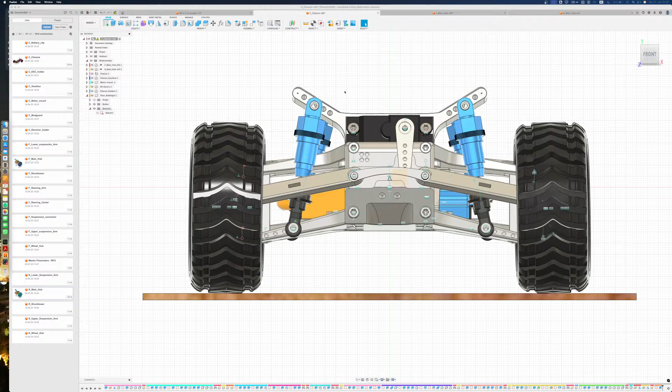So what I want to add today is KPI. I have this visual representation. This represents a tire, this its drive shaft. I know, not very realistic as it is completely straight and goes into infinity.

And now we have this orange axle, kind of axle, which is the steering axis. And this is the pivot where the tire rotates. And because we have camber, this is putting the steering axis on angle on the side, basically. I don't know how to explain it better.

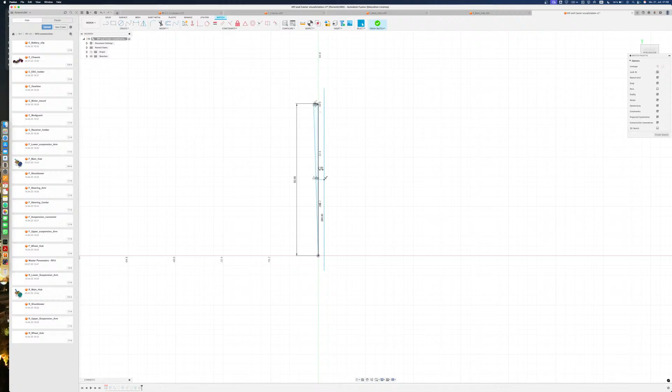And second, KPI, to put it not straight in this position on this side. And that means that you have a camber gain and a camber loss, depending on if you steer in one direction, and also it behaves differently depending on what you do. And it makes it just drive better. That's very scientific, I know.

Oh yeah, it works. Wow. So that is now, I don't know, like 20 degrees. I can check later. And now it has more camber gain in steering right and less camber loss when steering left, I think. I'm not 100% sure, don't quote me on this.

The stream is lagging a little bit, actually don't know why. I'm trying to give it more oomph. My hands are freezing because of the oomph fan.

But yeah, this is the system which I'm going to add today. I already have camber, but I don't have KPI, which is this angle, specifically 21.8 in this case. Yeah, my guess with 20 degrees wasn't that bad.

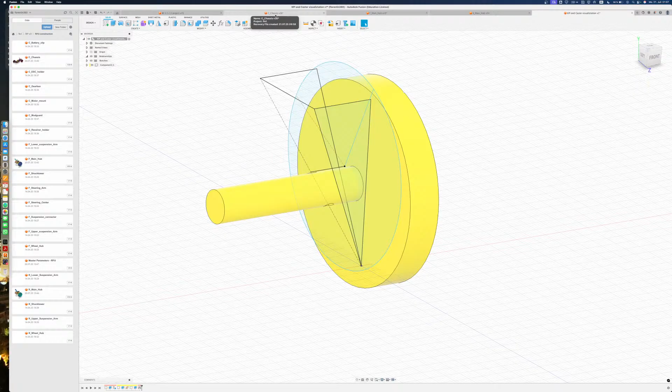I'm actually going to check this parameter setting, what I have there. And it's not very professional. I have KPI front, radian. I don't know if radian is a good unit.

Okay, interesting, I also have it. I do. Oh what, KPI rear, don't have any. Okay, that's not professional at all.

So I just, because I don't have it used anyway. I didn't know 100% what KPI was back then. Anti-squat percentage, I didn't use them all either. Used this, anti-squat, 5 degrees. I have camber, which is kind of anti-squat. Anti-dive, didn't use that. KPI front, use that.

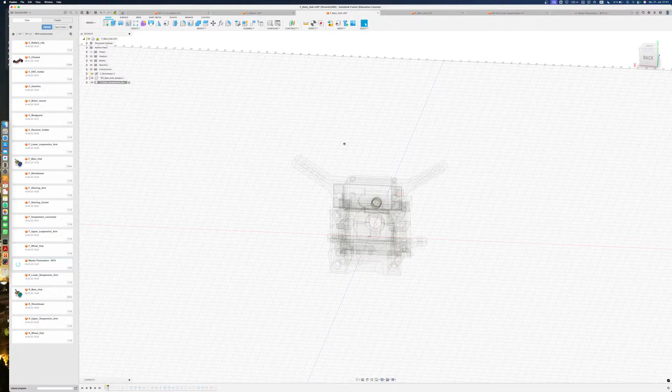So save that, then go into front, and first get new values. I'm actually, just to be 100% sure. Yeah, I know what that one reference is out of date.

These joints never work. Fusion, it's not my fault. You have to fix that. And now I'm going to get the latest version.

There you could also probably see the toe change. Toe out more. This was now or afterwards, before. Afterwards, before: 1.2 degrees, 1.55 degrees, that's better. And on the rest, not a lot should have happened, I guess. Of course the steering arm got longer and so on, but yeah, that doesn't matter.

So I'm actually going to check if everything works again before I start.

It's a big difference, you know. Yeah, I think this is what I'm just going to have now. So save that, then go into front, and first get new values.

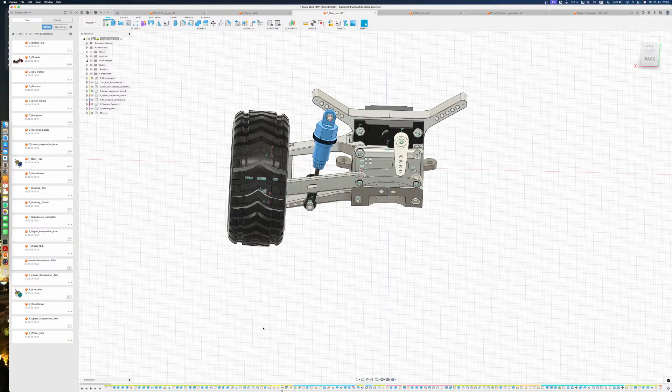I think it is suspension geometry, and there I have the front wheel hub. It's not, I don't like it, but can't change it later. That's kind of the stupid thing. I don't want to design a whole new front axle.

So here defined the toe, I think. Why did you just remove that?

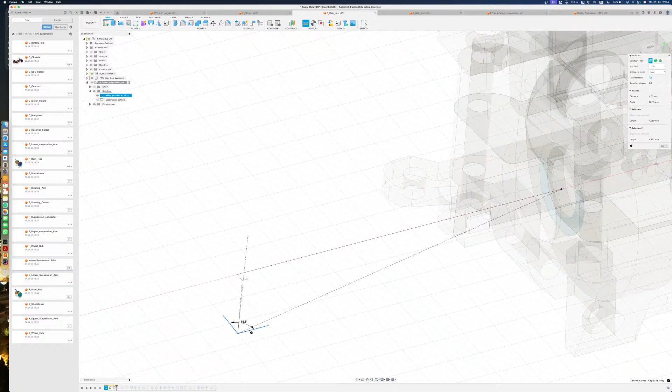This is the toe, 1.55 like I told you. Yeah, and it got the 1.55 degrees. Good. And we also got the camber, which is 1.1 degrees exactly.

That's math, ha, everyone loves math. Yeah, these two define a plane where the bearing, the wheel, then sits.

I do not change the wheel position. What I change is not even the caster angle. What is that? Interesting.

What I change is the connection. Yes, exactly, this arm length. These points change, these points change. So I think caster angle is where I define caster angle.

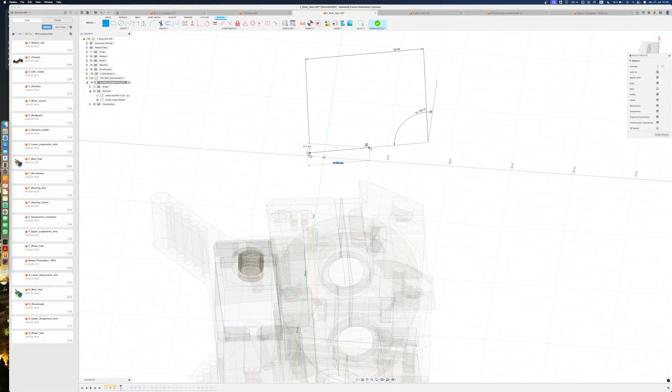28, what is that measurement? So between them I have 14. That seems like, I don't remember it. But it doesn't seem like a random guess. Maybe I should check what the rest is doing.

Here I just designed the front hub, and this is the shock tower, yeah. But these don't overlap. Oh, they do. Yeah, 28 millimeters. Okay, this is where I defined the space between the lower connection arm and the higher, where the ball ends basically connect to this lower and upper suspension arm.

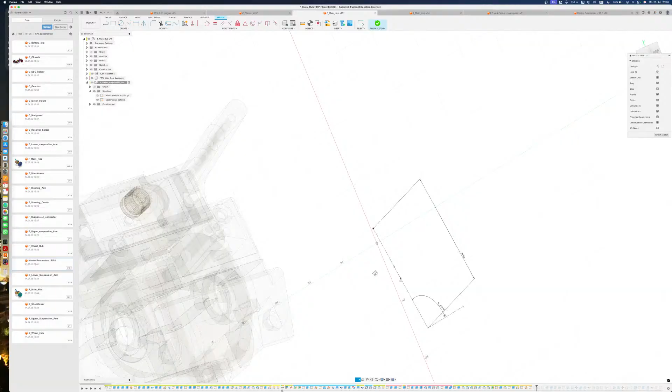And these kind of change. Is it a 3D sketch? Not yet, not yet. The 28 millimeters stay the same.

The only thing that changes now, I don't know where this projection point comes from. I would like to know. Do I find it? No, I don't know. I guess it's just wheel position. Yes, I'm a genius. But why is it so low?

Oh, this is the midpoint, right? This is the midpoint. Yeah, the bearing is in the complete middle of the upper and lower ball joint. Okay, good to know.

Where does this projection come from then? That doesn't make any sense. Oh, I defined it earlier. No, I didn't. Did I? I can change it quickly. No, I didn't, okay, undefined. Or this is, D3 is where I defined it.

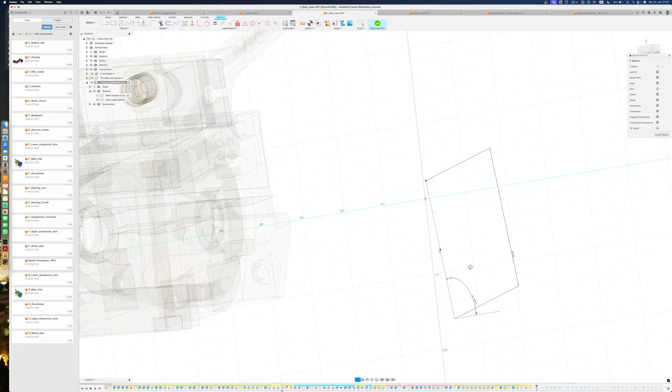Good, and now what I will do is make it a 3D sketch. And then from this point to just a random point, connecting these 2 points, this has to be 90 degrees.

And... god, getting dizzy.

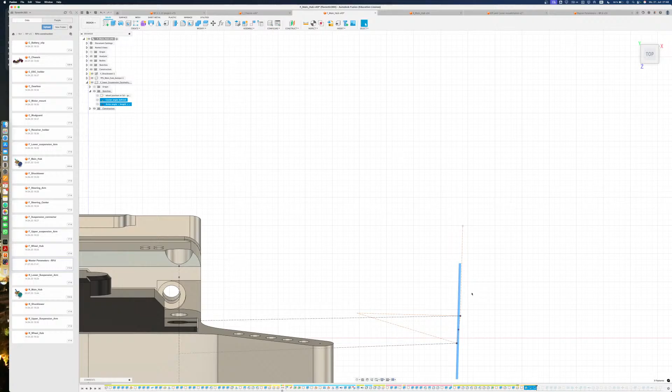This is where the wheel is pointing at the end, right? That is an important question. Are they parallel? It must be. And the answer is, I think so.

Okay, I found a flaw in my design already. I would say, I quickly want... it is a complex topic, not gonna lie, especially if you have to come up with all of this by yourself.

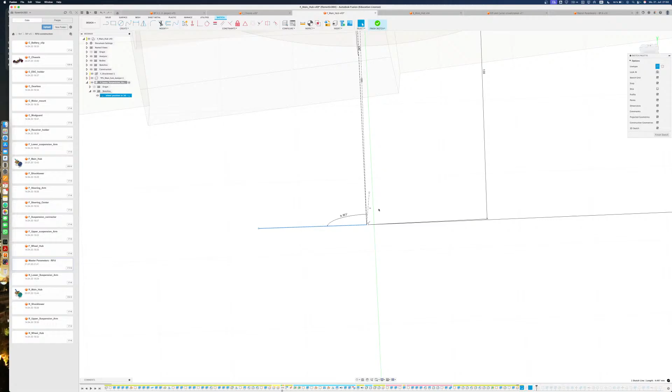Kind of. So this is parallel to something. It is. Of course, 88.5 degrees from parallel to the car's body. Or not, yeah, just like this amount of difference.

And viewed from this angle, it does seem like a right angle there. This goes parallel up. This is toe, this should be 90. Is it 90? It's 90.0.

I mean, it seems 90. It's 90, okay. So this is the... yeah, these two define the wheel sketch plane, I guess.

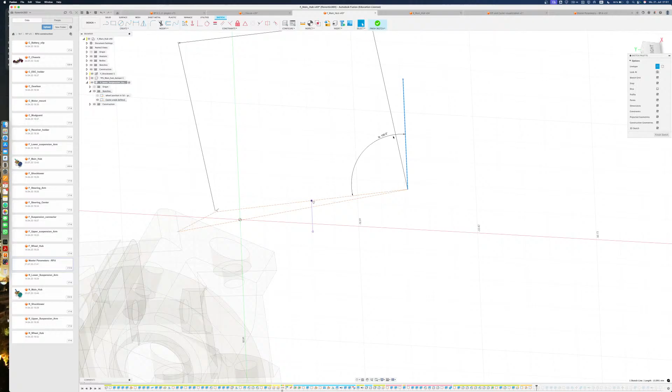Good, now I go in the sketch, project this line into this sketch because it's so beautiful. Make this line parallel to that one and then see the difference. It will move slightly, yeah. That's very important. I got this.

Okay, this shows, or is perfectly, you could say, parallel to the wheel, kind of like going in the correct direction. Then the caster angle is defined. The question is, is this in a plane, these two in a plane with this? I think so, if not that would be bad.

Okay, these two. Yeah, are these two correct? And the answer is, I think so, yeah. This little angle change is defined. I'm pretty sure, 100% sure.

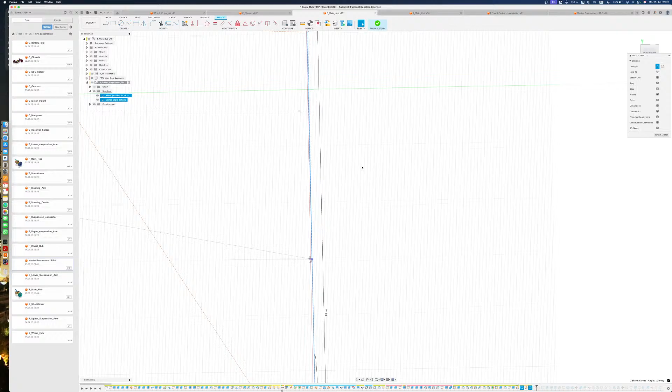You always have to test with extreme angles, because then you really notice if something is wrong. The question is, why is this not, or why doesn't it seem constrained? I don't like that.

I mean, theoretically, because now we have a 3D sketch, it got unconstrained. Yeah, I can rotate it slightly. Damn. Okay, then we have to constrain this again. Or, yeah.

Yeah, look at that. What? Oh, what? Okay, yeah, okay, it's definitely not constrained.

Let's project this line as well. And it should be possible to make, you could say, yeah, that's already it. Well, that was kind of easy, because this is in the same plane as this, or in the correct plane.

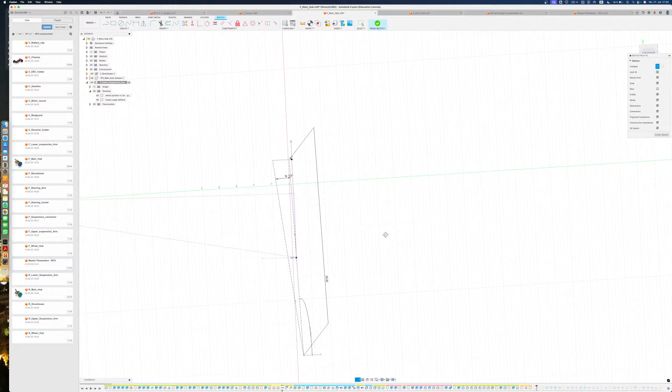And now, yeah, this line can only move in one direction. And now I can add a KPI front angle or reference and have this point. I would kind of like to change the 28 millimeters. Do I? No, I don't, to be honest.

And now I check if it actually is correct. Yes, that seems very correct. Yes, that seems awesome. Okay. So I have two new points which are interesting, you could say, which are important.

Okay, interesting. Yeah, I can make those construction lines. And then these are the important ones. That's why I make them

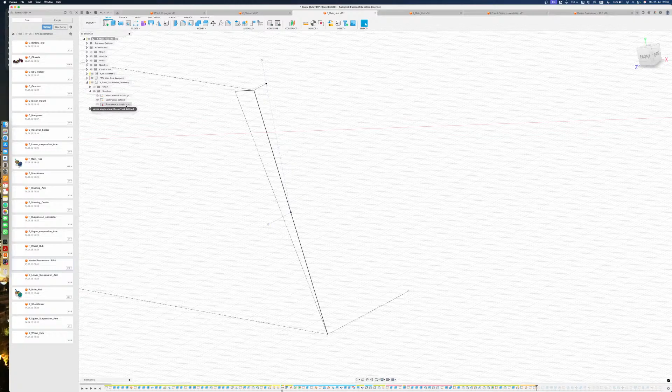Okay, next define arm length, I forgot that. It's an important step. Define arm length, 5 degrees of KPI, that's not a lot, but oh well.

Okay, I have the projections in them. Can I break this constraint? Yes, oh that's awesome, that's awesome. Please work now, move backwards maybe.

Yo, that's awesome. Okay, I think let's do negative 6. We changed those angles, this somewhat for some reason also moved. Yeah, because they're not parallel for some reason. Good, I don't care, that's good.

Seems to go down crazy. I'm going to project the whole line into this 3D sketch. That did not work, okay.

Project that point. What, it's a 3D sketch buddy. That should work. What happens if I project it or try to project this? I don't know what the fix is there.

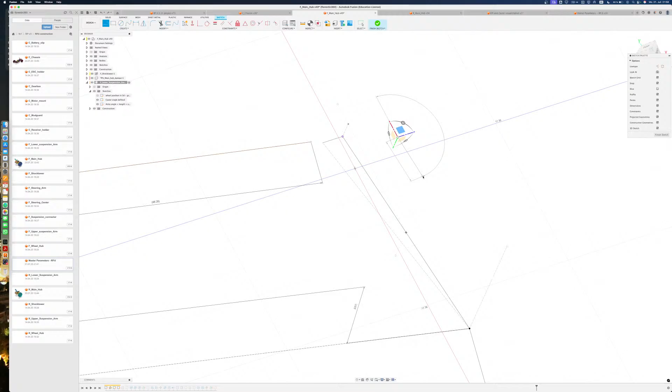Okay, I just did this to wake it up I guess. It doesn't work. What? I'm confused. I actually am.

Oh what, I can just add that. That does not... what? So I do have a projection point. Yeah, I do, why didn't it tell me? And now, yeah, in 3D space they're not connected, but now I can connect them. Just out of curiosity, you could say no, I'm just going to leave it like this. You know what I mean.

Yes, and now the front upper arm is shortened, which is also good for roll center stability. So that's, yeah, you don't complain about that.

My battery is at... actually don't know if I can show that. Wait. It is at 34.5 degrees. That's chill.

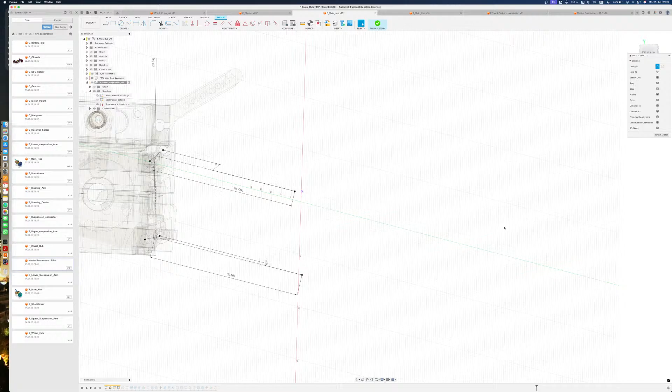Okay. Good. And now maybe the Wi-Fi is just bad. Okay, did this. Now, yeah, the front wheel hub should be defined by the same sketches. Wait, actually, if I think about it.

Now create this. 823. Ooh, that could get bad at some point, to be honest. Oh no, this could get bad quickly. Oh no.

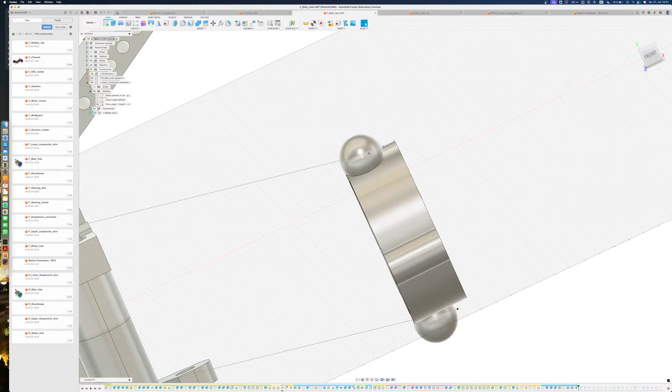Also has to be parallel to something. Let's first design the whole thing. Okay, maybe not that much. Does it go further at some point? Probably, no it doesn't. Wow. Okay.

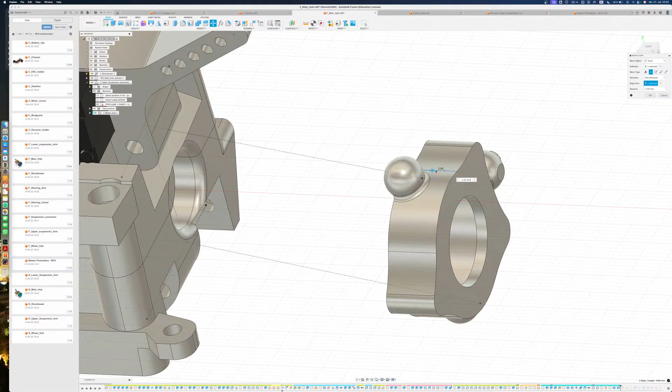What does that do? That just moves the whole of everything. I'll just, if that works for now, faces, move this, or translate it, or pick direction, should be parallel to that, and now move it, let's try 4 millimeters first.

This is bonkers. Oh wow, look at that. How it engulfs the whole part, or is the whole part, I don't know. Okay, I don't know if I necessarily like that, but I know that works.

What does the sketch do? Oh yeah, I know what it does, I know what it does. I don't know what that sketch does. Define something else, maybe do it before the, yeah.

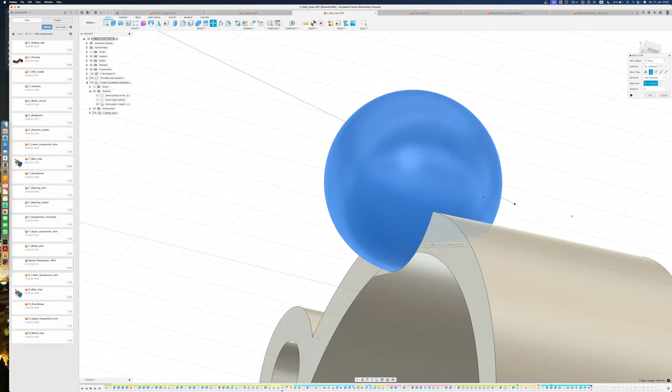Now move, pick direction. Let's, yeah, use this axis, and let's do 3 millimeters and check. It goes over the edge. I don't like that at all. I don't like that at all.

Oi oi oi, oi oi oi. No, it's not, 5 is not. It's D823, that is 2.5 now. Is that correct? I mean, I guess, if you look at it, yeah, it could be.

Okay, now move the ball joint 2.45 millimeters closer to this, making the A arm shorter and so on. Now I just have to find a fix. How to make it good. Then we'll go in F main hub, because currently nothing else matters.

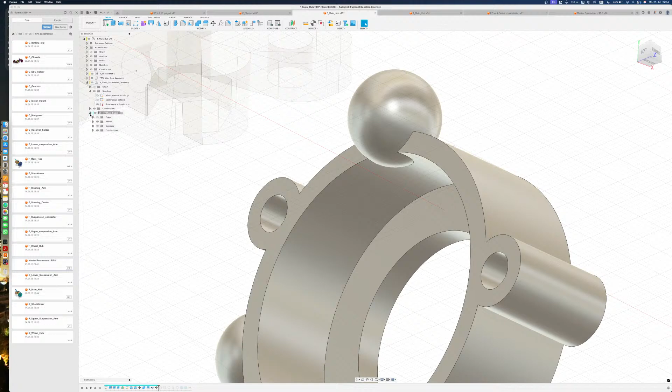What does this do? It's the same basically. Okay, interesting. Then go up here. Wait. And go up here and do unlimited more, to be honest.

Yes, cut only that body, exactly. Now I have a clean cut and it should not disturb any screws or something. I'll have to analyze the movement of the suspension later, because I feel like it's going to hit this, the upper suspension arm is going to hit right here, which of course would mean suspension not working. That is not okay.

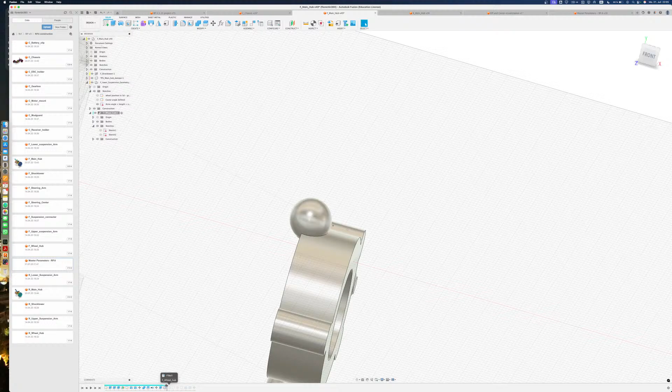Okay. 0.3 could probably increase that in this case. What is this? It's 0.7, or was 0.7. So let's go there.

That looks better. I would actually use even more, because I can at that point, or at that space. 2. Looks good, because I don't want this to be weak.

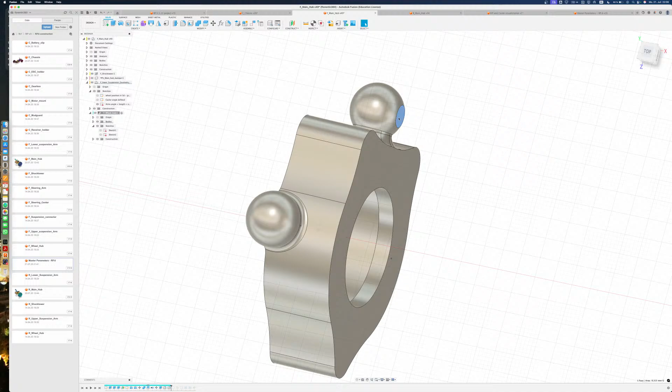Problem is I can't even, because this is on the whole right in this case, and this is on the whole left. Damn, and they're all at different heights. It's manufacturer's worst case, worst nightmare, but an engineer's best dream. That's what you want to have, want to do.

I guess now it works. Yes, I guess, I don't know. Yeah.

Cut. Oh, that's a little bit short for some reason. Why is that short? Why is that short? Oh no, did I mess something up? I don't remember, or why? This, of course, now fits. Ha! Damn.

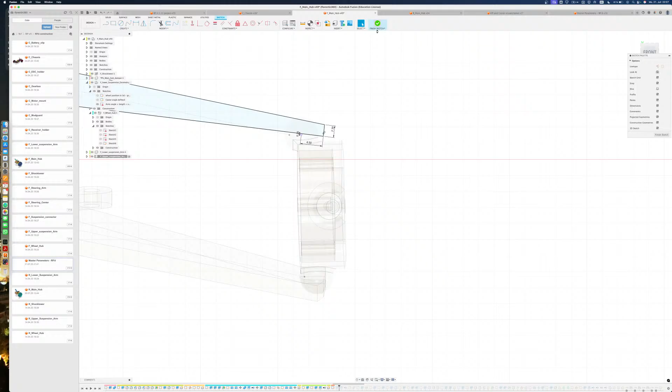Is this luck? Or what is it? If I project this point, it doesn't... Just... How did I project that? What? It still has something.

I'm actually interested, where did I get that projection from? How does that work? From... but the sketches are all old.

If I project that, that can't be. That would be a miracle that it fits now. Yeah, no, maybe. Could that really be the case?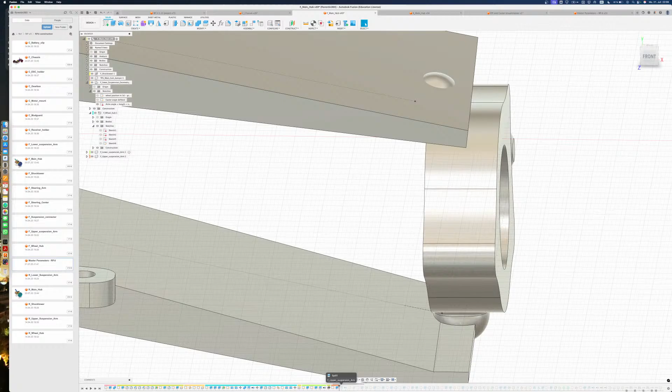Actually, I know how to not fix it, but how to make it good. How to make it good. Yes. Still has that. Good.

Construct, point at center of... sphere, not sphere. Ugh, English, complicated. Yes. Oh no, that should... I want that to be part of this.

Point at sphere. Now I have a point there. Haha, that's what it sounds like.

Is that the center? Let's analyze it. Yeah, it seems like it. If not, then I guess it's lost.

And now, lower suspension arm, edit sketch - have that wonderful projection which I don't like, so let's get this off. Kill this connection constraint thingy. Kill that projection. And now...

Point 1, point 2. Project. And there we have a precise midpoint that we can connect this to this. Yes, that is yummy.

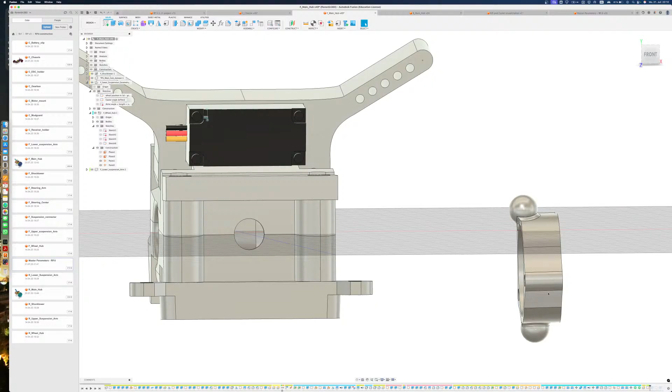I don't know why this is projected, but oh well, that doesn't matter, at least if it works. Wonderful, now it's completely engulfing the whole thing again. It's not even that strong, to be honest.

I've noticed that during driving or doing hits, this wheel hub quite often actually goes off or pops off. Just too flimsy, I guess.

I don't have a camera today to show you what I'm doing now, but I'm testing if the travel would hit this part if the steering arm goes down. Yeah.

And the answer is... not really. Like, maybe, yeah. Don't overdo it, of course.

Oh, sorry. But it works quite well already, or it works good enough. I can reduce the tolerances there, I guess. It's not really tolerances, but is it? Yeah, kind of it is.

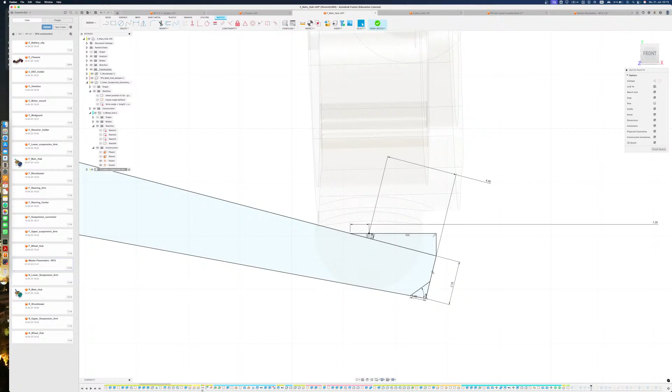Yeah, I think let's do 0.7. Yeah, 0.9, 1 millimeter, let's make it a beautiful number. Did that do anything? Kind of. Not much. Yeah, okay, I shouldn't overdo it. Yep, that's good, that's good.

I lost so many frames already. So now we come to the upper suspension arm. There. Oh no, oh no. Oh no, not a 3D sketch. Hell no.

That's not good. Let's do that, 0.2. No. Hello? 0.2.

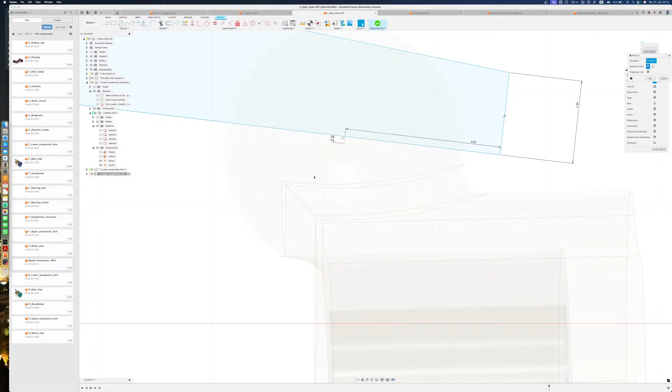And do this, 4.5 exactly. And this connection will be deleted. This will move away. This point will be deleted. This vertex will be projected. Oh wow, that was actually in the correct area. Wow, and now this can go down.

And what I can do is reduce this length a little bit, because I feel like I have to. 0.1, now it's in there more, because this ball is being cut out, basically - making the ball joint.

Good, now yeah, it's being cut out. Now it's deleted, the part which is cut. I could actually make it joined - joining the parts, which would make this useless, but oh well. I forgot that, or well, didn't know.

Now I'm making the suspension connector. Now it's getting ugly already. I know.

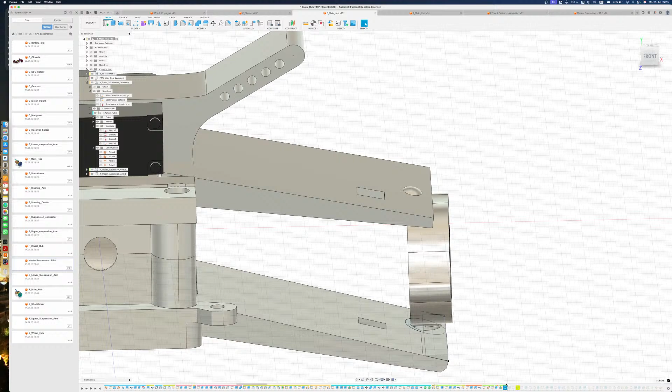That's not good. Edit sketch. Where did you think that was a good idea? What? Oh.

It is 0.5. Huh? Why don't I just project this? Why make it so complicated, actually?

Remove this. And then just connect this to there. Isn't that possible? Isn't it? It is. Heh heh.

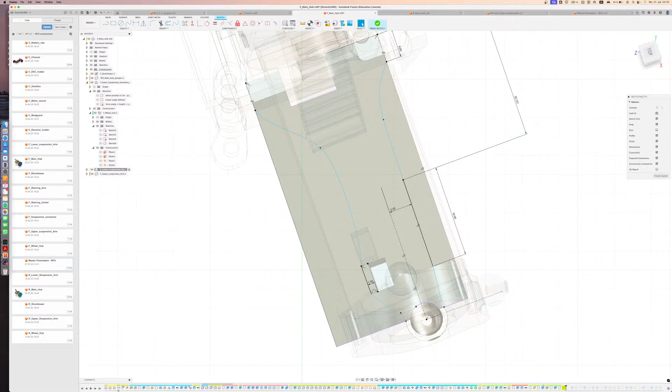Am I an idiot or just smart? One of those. Yes, that's beautiful. And if that drives, that's also beautiful. That is beautiful. Okay, I'm already dreaming. I'm dreaming of driving the car already.

Good, now... why did they get lost? You always have to think, why did the program do that? Sometimes it's trying to tell you something, that you're maybe stupid or that you did something wrong. But sometimes, I don't know, sometimes it's just nothing. Pure nothing.

Should I make the lower arms thicker or thinner? Probably thicker, there's no reason to make them that thin. 10 millimeters - not making them that much thicker, but a little bit. And that looks decent, I think I'm quite happy with that.

Then we have this. I'm freezing in my room, it's so cold. I'm checking the battery again, wait a sec. It's only at 33 degrees. It's almost freezing, like I do. I'm putting on a pullover. It's also cold.

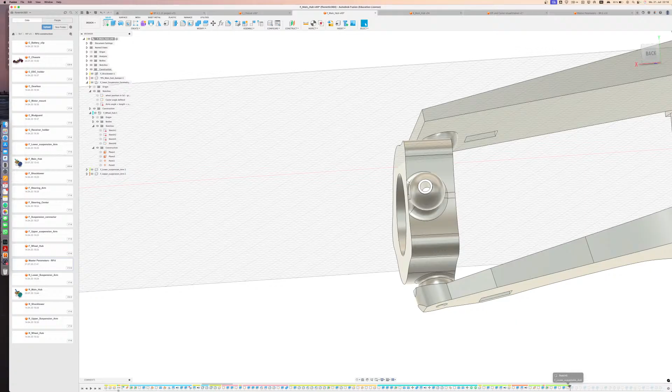Okay, have it on. Oh, that's so much more comfortable. Doesn't complain about anything. Why is there a green line? Always check stuff, which is weird.

The green line means... I hope nothing. That's weird. Weird stuff is weird. Yeah, 4 pins is correct. This is also correct, I think. That seems good. Wow.

Do I even need that, to be honest? Yeah, otherwise it will hit the thingy. This is... Is that correct? Yeah, it is. Wow, what the heck?

I forgot how I designed the whole car, basically. And it's driving mostly great. Not 100%, that's why I'm doing the changes. But it's pretty decent, not gonna lie.

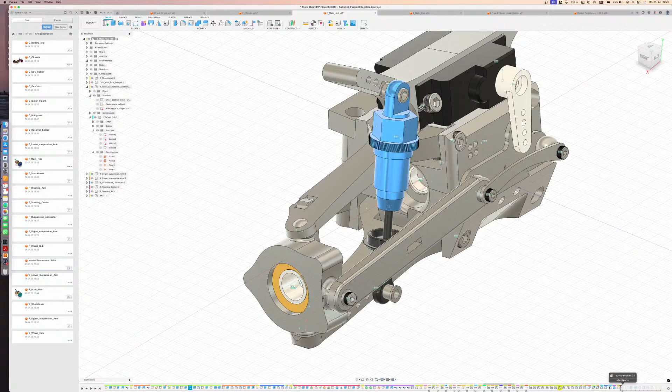I thought with all of this engineering it would be better. But... nope. Oh no, just like that. Where's the problem? Do you want to tell me?

1.1. Okay, that works. Oh, it's 0.93. Can that work? That's wonderful. That works. That works. And 0.93 just doesn't work. Oh well. Wow. What a massive difference that makes. That doesn't.

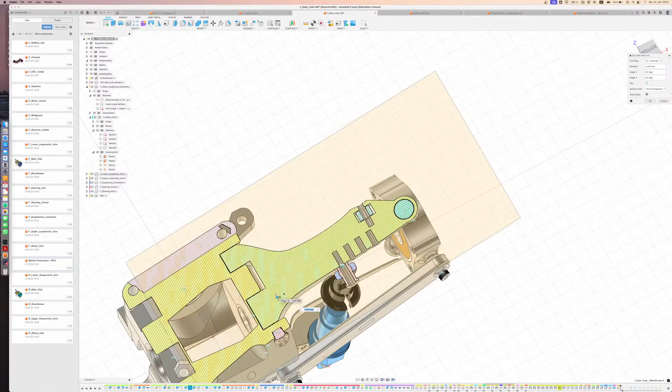I would still like to know where. Just out of curiosity. I mean, yeah, we're going to work. I'm almost done. Wow, almost... whoa, almost all the thingies work now. That is crazy.

Because they're random. It does work. It's lying. Yes! Look, it changed nothing. And now it works. Wow, I think that's the first time all of the joints work. That's actually insane.

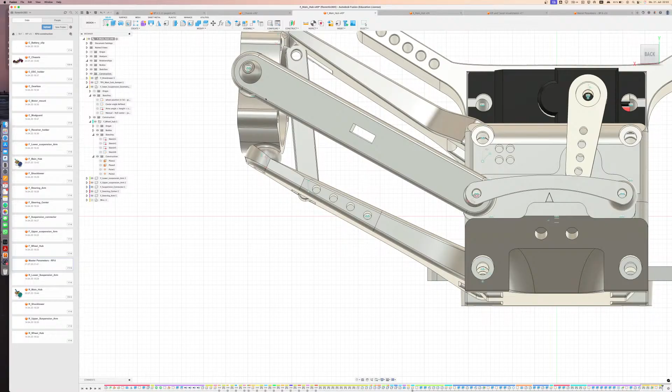Okay. Yes! I think we have to test that, if it works. Wait, let's remove that tire. Oh yeah. Of course, I have no idea if it like works, but math isn't going to lie, right? Looks really promising.

I'm trying to zoom. Yeah, that's better. Yeah, I wouldn't know why it shouldn't work. It looks like it's going to work. And if something looks like it's going to work, it works. I don't know if someone ever said that. Okay.

This point, that's actually a little bit too much, I would say. Let's reduce that to... wow, I forgot what I said. I would reduce this to 0.10. Yeah, I think it's better just to have it more tight.

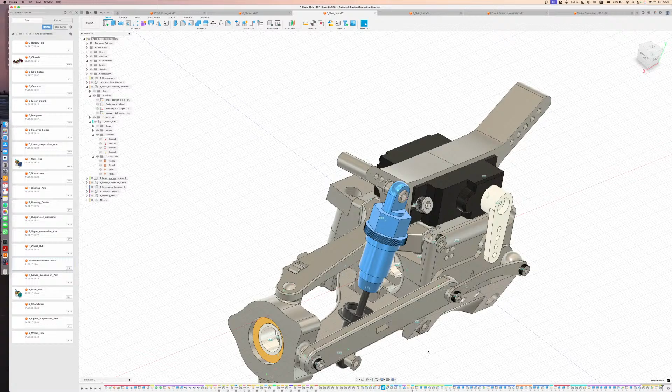And do I have them separate? Wow. Okay, interesting. Let's do it. 2-2. 2-2. 2-2 up there. 2-2 up there. Then 2-2 down there. Oh yeah.

Game with tolerances. Now what is that? Oh yeah, okay. Those tolerances were actually good. I would leave them. Those tolerances are good as well. What are these? Okay, this was this. This is this. This was ball joints. This is differential, I guess.

Suspension connector. Good. I think that looks like it's done. Who would have thought that's this quick? I've only been streaming for 50 minutes to design this.

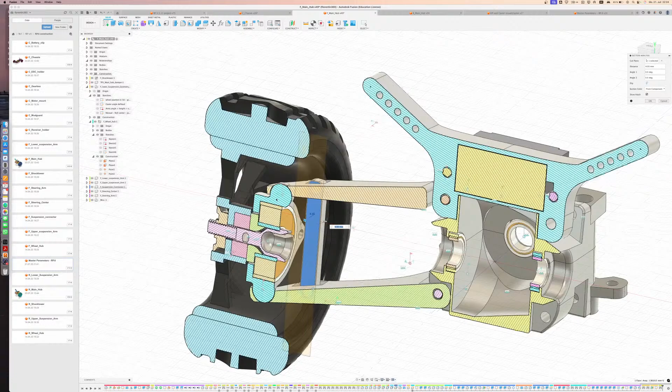I mean, it does look questionable, if that's going to hold and so on. And now what we can do is analyze.

Yeah, doing up tilt could be too much. Maybe. But doing down tilt, I don't know what to name it. It seems good. Yeah, it seems to be. So this doesn't go out too much.

Differential and right inside - that would be too taxing on my PC. I mean, I would try to print it like this, to be honest. I'm scared.

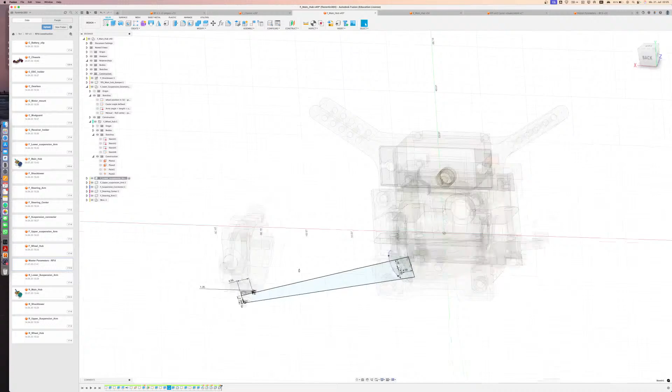So let's maybe do it only 0.8. It's more than before, but yeah. Look, now I have these warnings again. What did I change? Nothing. What did the program change? Nothing, but it doesn't work for a random sake.

Good, and now move up. That's a lot better, that's a lot better. Of course, in the design it'll still fail, but that's the design - it's not real life.

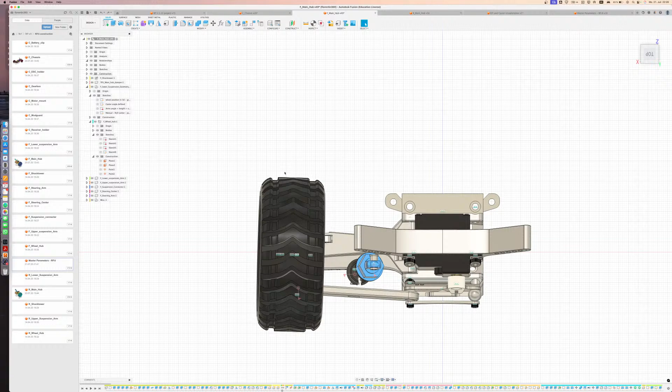So I'm just going to leave it for that for now. Toe looks good, toe out, yeah. Then - oh no, I don't want to rotate it. Camber looks good.

And now what we can do for just testing it, wait - add a joint, rigid. Okay, never mind.

Calculate. Oh no, it doesn't like that for some reason. As if this makes any difference, guys. Oh yeah, of course, motion. Okay, never mind, I agree. The motion link, of course, then fails. It can't work physically, it doesn't make sense.

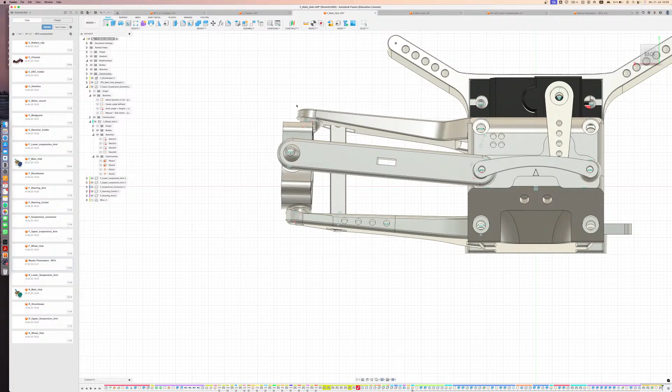Okay. Now, if we move it up, got a tiny little bit of camber gain. And down here we also have a tiny bit of camber gain, I think - it looks like it at least, yeah. That is 100% fine, that is desired.

And now, oh what - actually didn't want to. What I wanted to change is locking one of those suspension arms.

Bodies. Just for further analysis, what I'm currently doing - we don't need that wheel parts and so on.

Edit joint. Then rigid. I hope that works. Yeah, it does work, because it's designed in place. So you don't have to revolve for doing something.

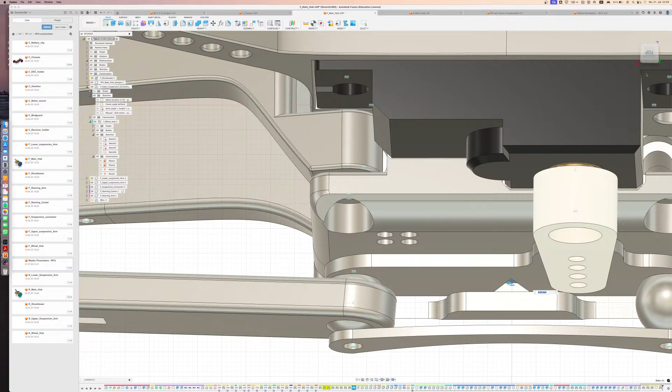And now what you can do - get this joint, slider joint, and then move it. Here we have the degrees, and currently, yeah, now I can make an analysis.

Going straight, it's not enough of an angle to tell him. 1 degree is free, -1 degree is free. 2 degrees, or -2 degrees is -7, if that's, yeah, -7. 2 degrees is 7.

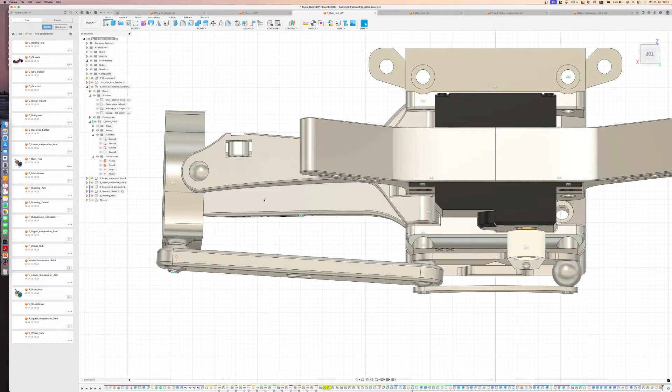Now camber change - how do I look at that? Camber change during steering.

Does that joint also say something? -48. -80 or 82? What does that mean?

It's not the cleanest thing to say, to look at the camber angle. I'm thinking about a system to have this basically as an angle. It has to be to the ground - that's kind of my problem.

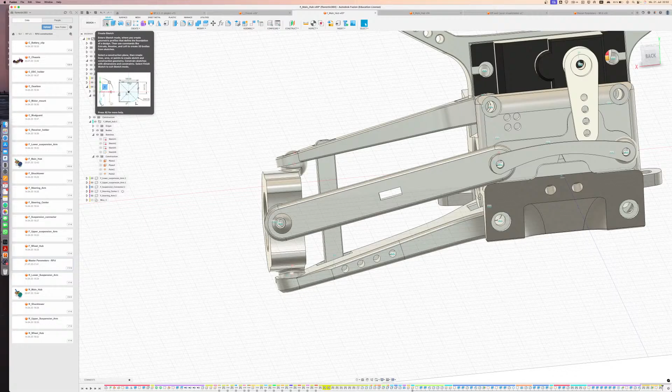I'm just experimenting currently, so it doesn't go down horizontally. It goes down, but... did I? No, it didn't. It's a 3D sketch, so project the whole lines, please - that would help me a lot.

No, I don't like that. I can also just do that if you like that more. I'm talking to myself. Okay, that's not okay. I mean, sure, we can do it like this, but - or can I just do this? Yeah. Well, that's stupid.

Okay, now I have this thing, which - why is this only allowed to go in one direction? That doesn't make any sense. It's not locked in that way.

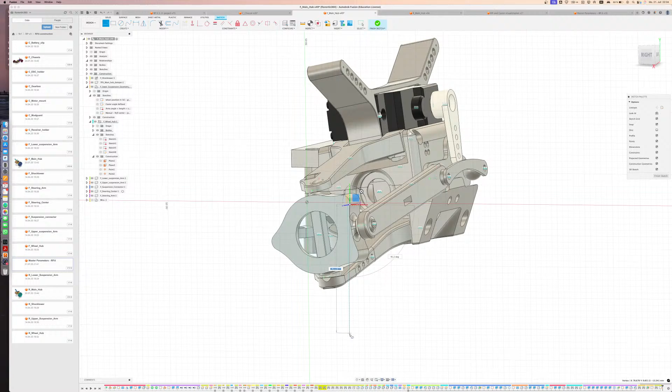Yeah, now I should be able to rotate it. I think I am, it just doesn't allow me to, basically.

And now, yeah, I need an angle which is horizontal, and that should also be 90 degrees. Did it? That didn't work. Boom, yes! Make that.

The length doesn't even matter, to be honest. And now, compared to - that didn't work, oops, I think. Boop. Compared to that. Heh, yeah, okay.

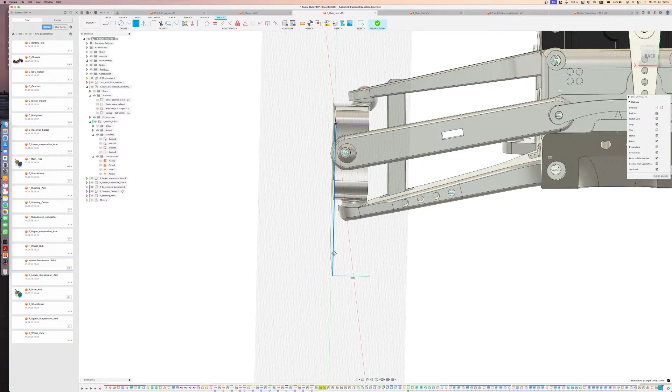If you want me to define it, then I'll define it, sure, and I can see this angle - 90 degrees? What? There's no way.

What? Oh, it doesn't move with the sketch. Okay. Okay, what I designed here is bullshit.

What else? Or how can I do that? I don't know. We can just look at the tire, I guess. It's not a professional way, but oh well.

Get that joint, and then put an angle on it. We just have to always look - we also have to know where the bottom is. Oh wow, now it's really falling apart. I mean, you kind of can see it.

Now we got camber, positive camber. Hashi, are you Sophia Lau? Or who are you? Do I know you?

Wait a sec, I have to know what camber out and in is, or positive and negative camber. Oh wow, hello, nice to meet you.

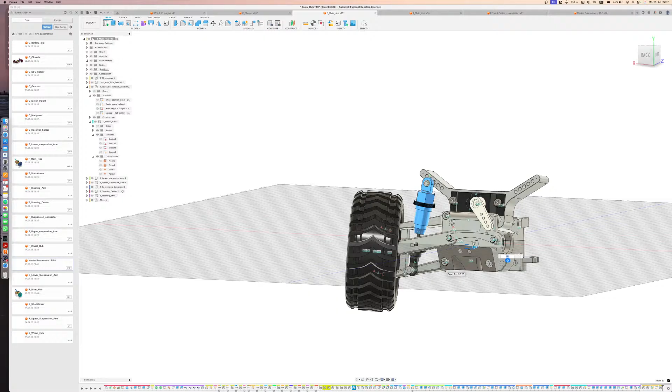Yeah, I'm currently designing this front suspension for an RC car. In the end, it looks like this. I also 3D printed it already, and yeah, then just drive it with a remote and hopefully be happy.

And yeah, what I added today is - you don't know it, but it's called KPI, Kingpin Inclination. These two joints, which are ball joints, are not, you could say, in line with the tire, but inwards, so it has some more complex changes. Yeah, it's some race car engineering stuff.

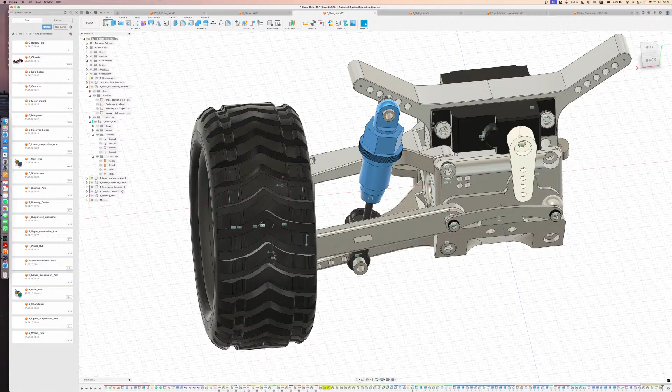Also, like, these are the rest of your vids. Yeah, I play Minecraft and Fusion 360, like CAD modeling, what I'm currently doing. But nice that you're watching, and I never had you on my stream.

That's funny, yeah. And now I save this, go to the rear. Yeah, it is very cool if you've never seen it, but it takes so much work, I think, for the whole car, and I also have other, like, my previous projects.

This is 5.13, as you can see here, and this is 6.0 now. And this took me, I don't know, a week, every day like 5 hours, so 35 hours in total, roughly. I don't know.

Oh, you watched my Minecraft streams a year ago. Thank you very much. I think you never commented. Yeah, you never did. That's cool.

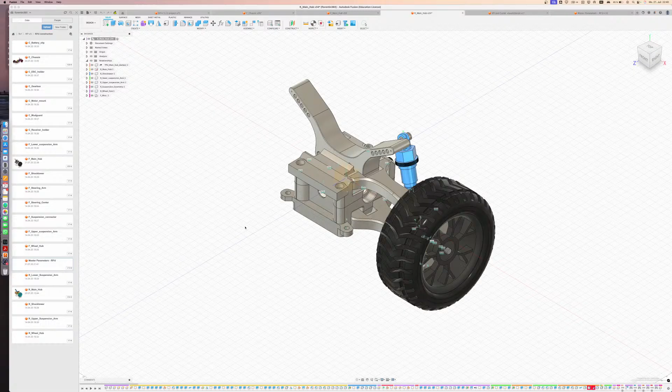Now, go to the rear, get the newest data, and then it always does this. There's no reason to, the only thing you have to change is by 0.01 millimeters, and now it works again. It's a bug. It shouldn't exist, but it does.

And now, go to the chassis of the whole project. Hello Doomy, nice that you're also watching. What's that for? It's for my RC car project. And now I can get the latest version. And now everything changes.

A crown, what does that mean? XP? I have no idea what that means. Thank you very much, what you ever did. I appreciate it, of course, for watching and also for chatting, and I don't know what that crap means. I have no idea, can you tell me? Just top fan something.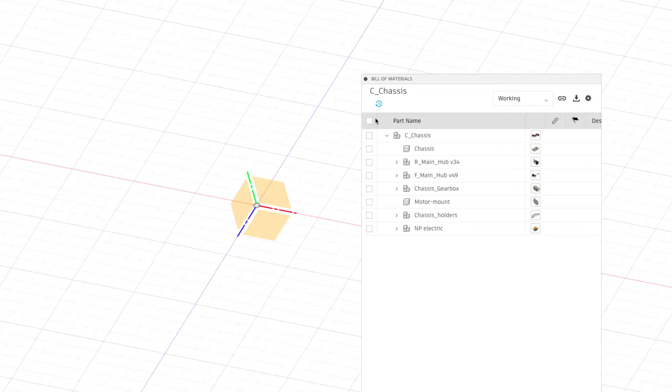How do I get rid of it? I actually don't know, I clicked on something. The car disappeared. Yes, too fast.

Am I really going to know it? Undo, no, I don't. What? That doesn't make any sense. Okay, maybe I should save it before I do anything. Too furious. That too fast, too furious.

Go to the beginning, it first has to upload. I think I destroyed it. That doesn't make any sense.

We're so linked, of course. My audience is the best. My computer's dying.

I think at least I saved it, because Fusion 360 sometimes crashes, and then you sometimes lose your progress. I think it's actually going to crash. Well, oh no, oh wow. Okay, I'm going to close that program, or not program.

Oh no, I changed something now. Or did I? Yeah, I did. Calculating, it'll be found. No, it's not back, it's the old version. Wait. Everything is so slow.

That's why you have separate projects with just the rear. Oh my god, with just the rear and the front, so you don't break everything, I guess. No, I opened the wrong thing. There it is.

Now I'll test it one more time, and if that doesn't work, then it's broken. Preparing, it's just gone, okay. Well, it doesn't like it today. It doesn't matter. That is really strange, it doesn't even do anything anymore. Kind of.

Okay, this project kind of, or not this, I'll worry about it sometime. Praying it works, no, it doesn't work. I lost faith already. What I'm now going to do is reprint the parts, because of course the dimensions and so on changed.

So I'll export them and then send them to the 3D printer basically, and then have a better car. Yes, lower suspension, no, lower suspension arm, yes. I hope it works, thank you very much.

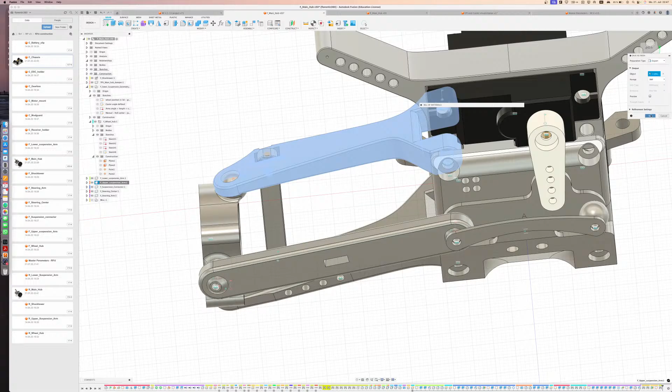Did this change? To check that, you open an old version, then measure them, and if it's different, you know you have to reprint it. I also don't know where this bill of materials came from. I know that it's a setting, but yeah, I know. I don't know.

Go away, go away. Okay, the dimension is 30.2 millimeters. And here it is. No, I don't want to sketch something.

No, it's 29.7. That's too large of a difference, so I have to reprint that part. That's how it works.

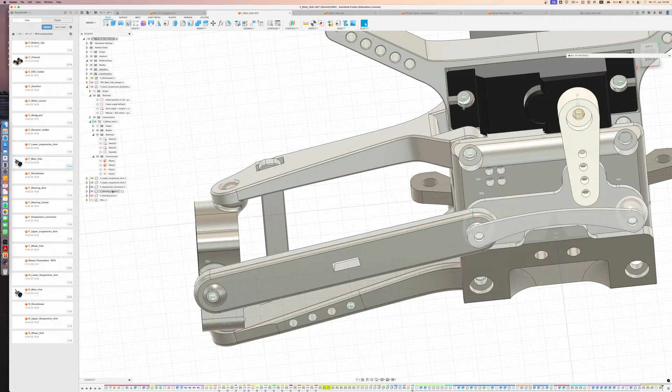Save as mesh. Okay. Save. Yes. And now...

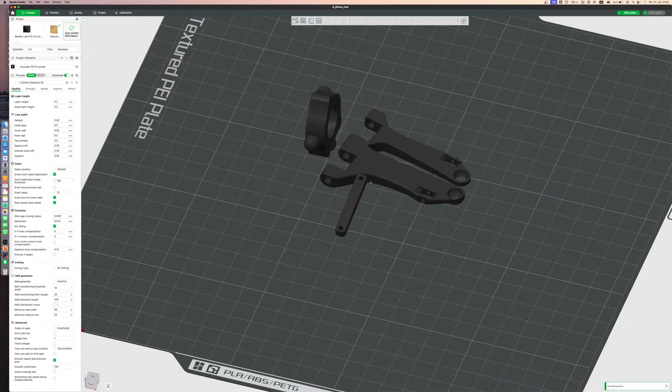You first have to lay them on the bed so they actually can print. If you, in like 10 minutes, something, I'll start to print, but you don't have to stay awake for that long.

Clone. Mirror, mirror. Oh god, they're shaped or they're not parallel to something at all. Ugh.

Or you can also just check in 5 minutes again if you want to. I don't know, is Doomy still alive? This I also have to mirror.

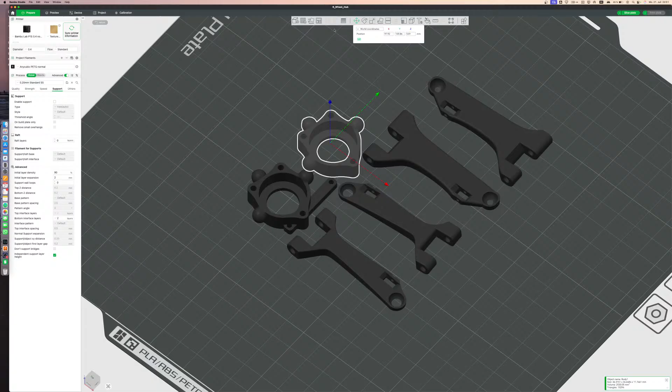I have no idea what the setting is. Right click. No. Huh? Seems like it's the first time I'm using this program. I don't.

But everything's laggy, to be honest, because I'm streaming. Yes, I'm still in the live. Oh, that's awesome, you'll be amazed in a minute. I'm putting the expectations high.

That's not good. So, enable support. Printing it, let's use PLA, because it's a little bit easier to print and cheaper. And now line type. Here we need supports to print those parts.

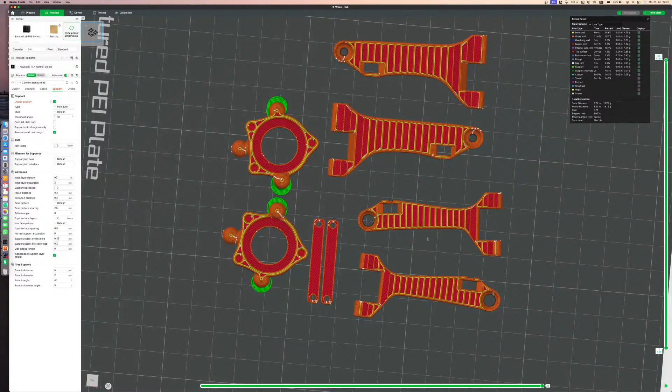The rest should be fine. I hate that they're not parallel or something.

Yes, you did put them pretty high, but I know that I'm going to enjoy whatever you're going to do. You make it sound super interesting and calm. Oh, thank you very much, that's very sweet of you. I didn't know that engineering and so on sounds calming. But that's good.

And now everything looks more beautiful, and beauty is half of the work. Slicing, okay, taking an hour. That's going to print through the night, kind of, halfway through.

And then I'm quickly running to the 3D printer and turning it on. Wait a sec, I have to make the screen black. Safety.

Okay, I'm back. Go, go, go. What, go, go, go. I hope that works now. Yes! So I started my 3D printer and I'm now connecting to it via Wi-Fi, or I think so.

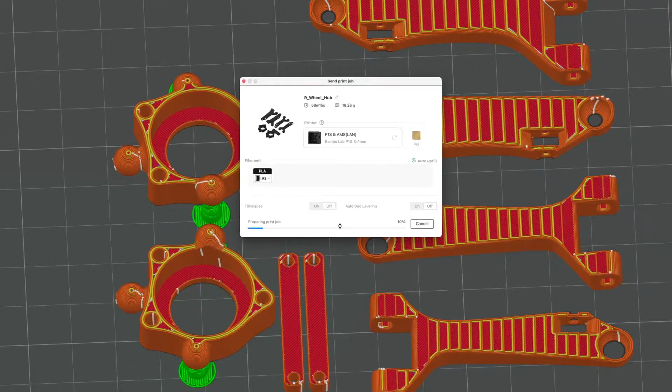And now, then you send it over the internet to your printer. That's my 3D printer. Print plate and send. And there it goes. Go run to the printer.

Thank you, I did that. That wasn't too hard. And here you can also have a lot of settings. Yeah, you have to learn it at some point. But if you're interested in it, you get used to it.

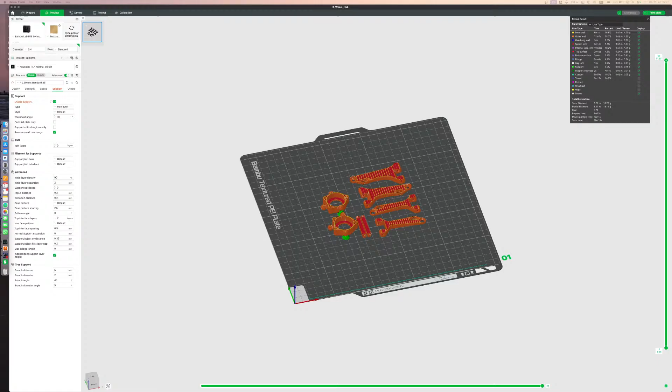Does that work? Yes, okay. At least.

So this is the 3D printed car version you just saw, in real life. Wait a sec. And yeah, what I just redesigned was those front pieces.

I also need the TPU arm actually, because the length of this also changed, so I have to reprint that. And yeah, this had 0 degrees of KPI. That's basically what I changed today. That's why I called the stream changing KPI or something. I don't remember. What the heck?

What? Yeah, pretty cool. And wait a sec. I don't want to leak anything.

I can show you a demonstration, at least. That's not too hard. You have this remote, you can turn it on, of course, and then you of course have all of those electric. RP V.6, KPI edition, yes. And then you turn it on, or plug it in to turn it on.

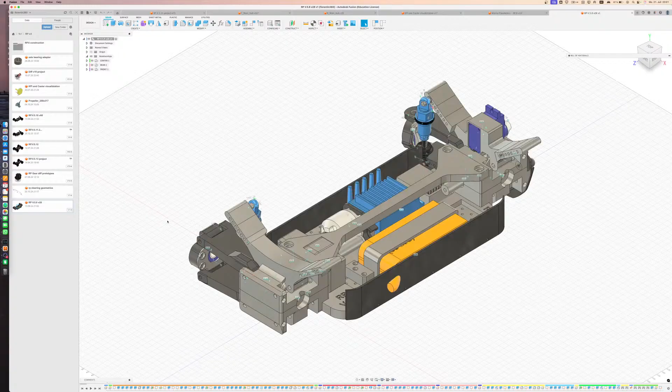And 5.8 is, as you can see, a little bit different. I, of course, see all of the differences and why it is worse. Yeah, but yeah, I printed them. I have so many videos about them, not uploaded on YouTube, but I know I planned on making a huge video, but I don't know.

That's also kind of difficult, so many holes for the front and so on. Yeah, it's a little bit not so good. And for example, here 0 KPI. It does have caster, because caster is the most important and simple angle stuff you can have. So that's why I already have it. And camber and toe in and toe out, of course, as well. This actually has 0 degree toe on the rear. That's interesting. Yeah, that's how the car developed over the time, basically.

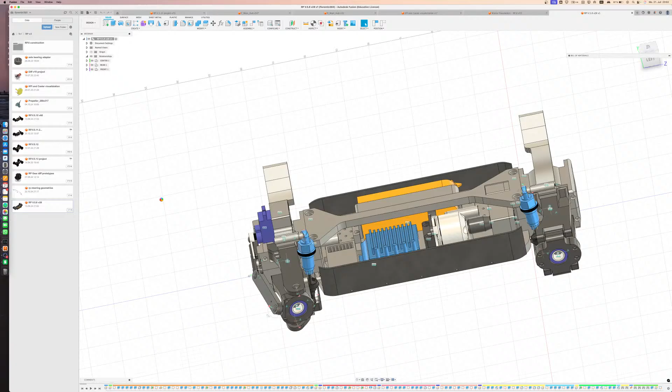And one cool thing is the differential, which I'm kind of proud of. The differential makes the rear, the left and the right wheel, be possible to turn at different amounts. And yeah, all of those gears make it possible that this works. It's quite complicated to design in CAD modeling because, yeah, the teeth have to be aligned perfectly and have to mesh correctly to, yeah, in the end, have the best meshing and that they're as strong as possible.

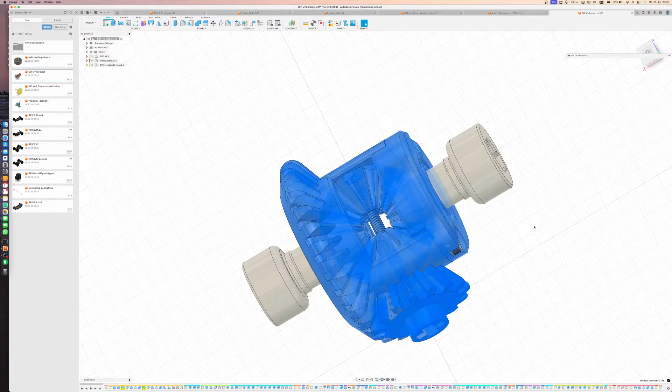But with 3D printing, the tolerances have to be quite high. In this case, I have 0.2 millimeters, which is, well, it's fine. And that's why if tolerances are too high, they can break. But yeah, this is the whole differential, which is in the front and rear of the car, making it better. It's in here, in this large space. I don't have it in there because, yeah, it would be too messy.